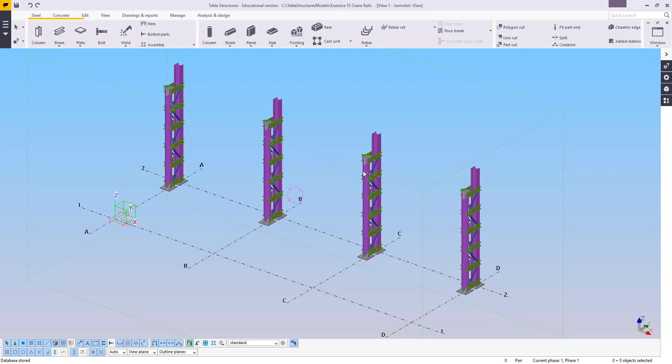If you have a look at the drawing provided, you'll see we've got this plate girder up here with a bunch of stiffeners inside, and it goes through the entire building. It does need to split because it can't be the length of the entire building, and you'll find it's got these stiffener plates inside but it's still continuous. What's going to happen is they're going to split it right here on the centers, but they are going to weld it up on site.

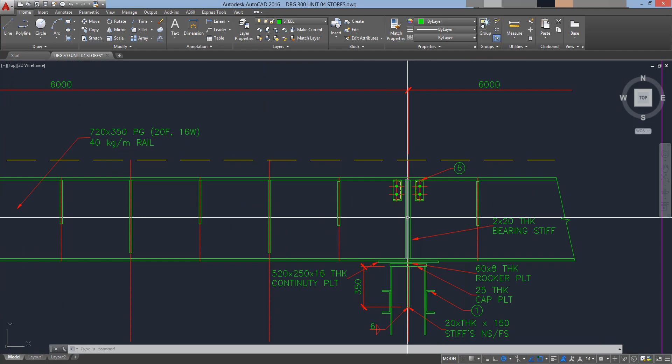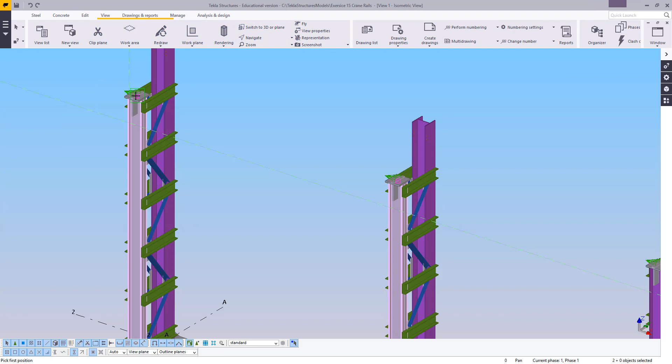So let's start off by first putting in our plate girder. In order to do that, we're going to need a nice side view. I'm going to untick the geometry lines, which means I can only select reference lines or main points, so when we do it now we don't have to struggle to find the right spot - it'll more easily snap to the main point on either side.

Now let's head on over to our steel, open that up. It'll be an M, or CB, crane beam. We need to close up beams because we're looking for a 720 by 350, and we do not have something that's that big. What I'm going to do is go to my drop down menu, go to catalogs, and add it as a profile.

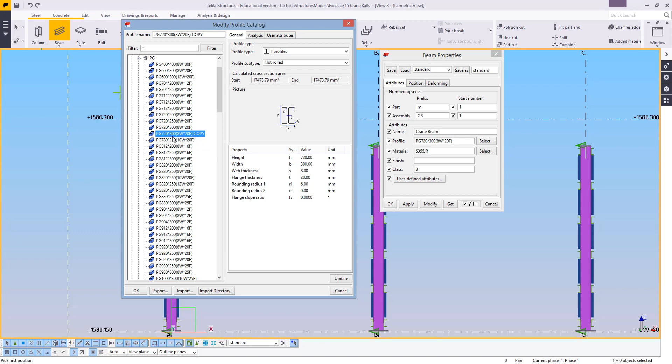So let's see, we're looking for an I, we're looking for a plate girder. This is the closest one we have to the actual size, so we're going to use that as our base and make a copy of it. Once you've made a copy, head on over to the top name and just remove 'copy'.

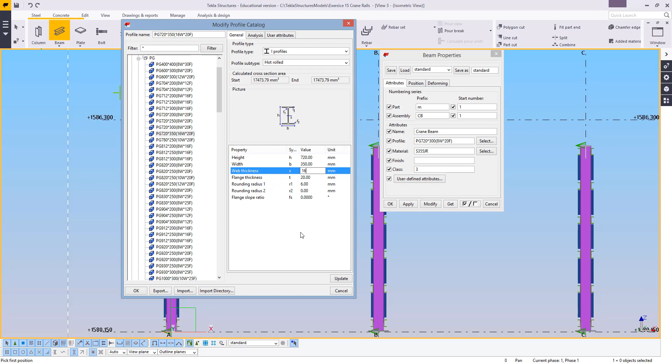Change the flange, we're looking for a 20 thick, that is correct. We're looking for a 16 web, so change that to 16W, and that'll be that one over there. Press enter just to confirm, but that was only the name - now we need to do the same thing with the actual dimensions. 350, and the web is 16.

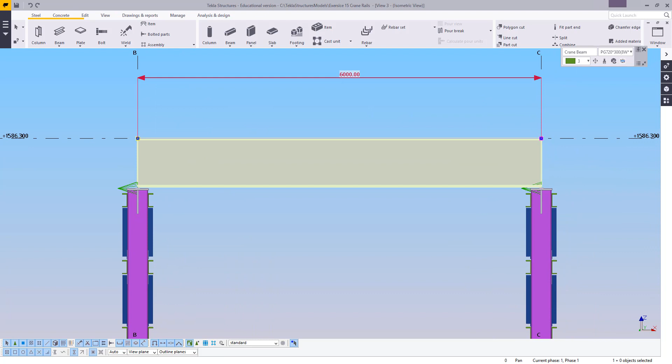And this is going to be in these three spots. For now, I'm going to delete those two - that's probably the best way to start off with, as they'll all basically look the same in the middle.

Now the first thing we need to do is to take these ends, and we're going to put in a 20mm bearing stiffener. We're going to look for stiffeners, and we're going to look for our normal 1003. This is going to go right at the end - actually not right on the end, about 10 back, as this is 20 thick. And we're going to go over there, just make these 20.

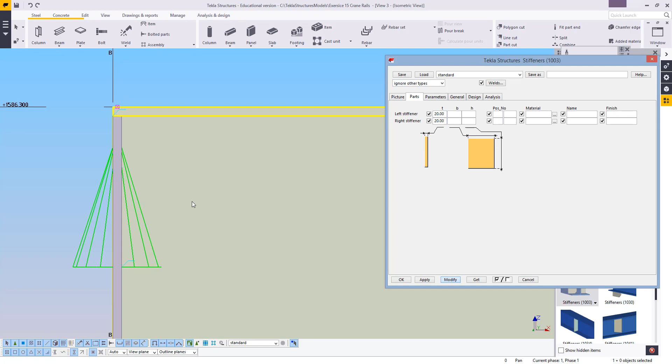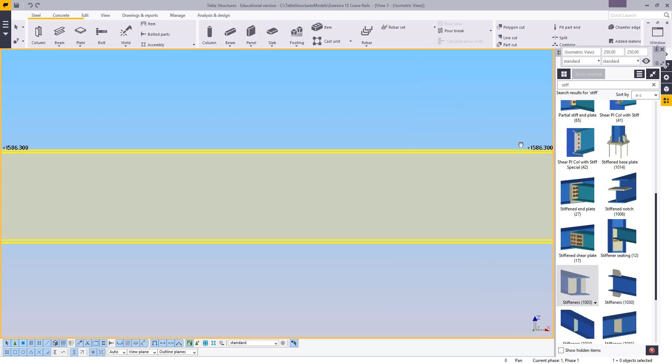Also, I'm going to take both of these and then just shorten them by 2mm, and do the same for this side.

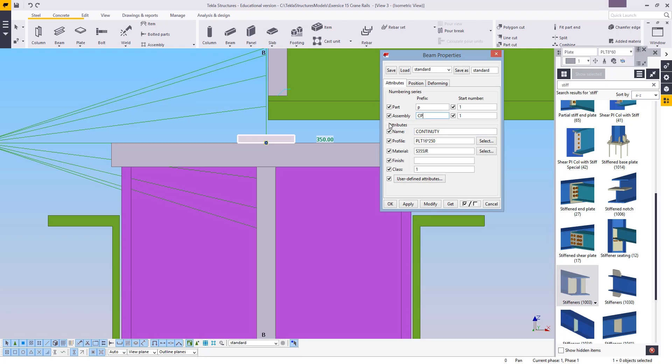Now, like we did the plate here at the bottom, this rocker plate, right under that or above that, we've got the continuity plate. So that's going to be 16 thick by 250 long. This is going to be a continuity plate, CP. Excellent - grab over there and just say it has to be 520.

Now this will most likely help if I just change it to behind, as I'm using the top. I'm also going to move it back by 2 millimeters, get that point right on the middle, then I'm going to grab it in the middle and move it back again.

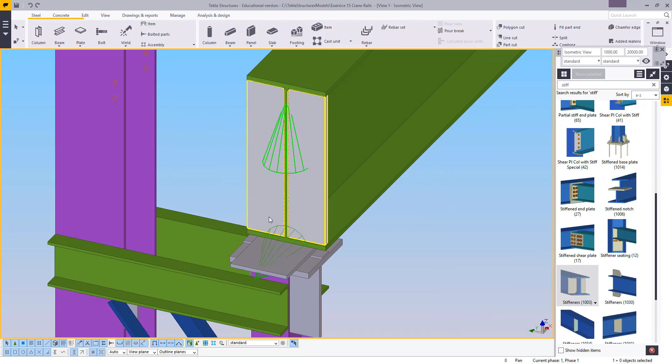Good. Now, I'm not going to weld any of this stuff to the frame. I'm just going to put a note in that requests that it is welded on site.

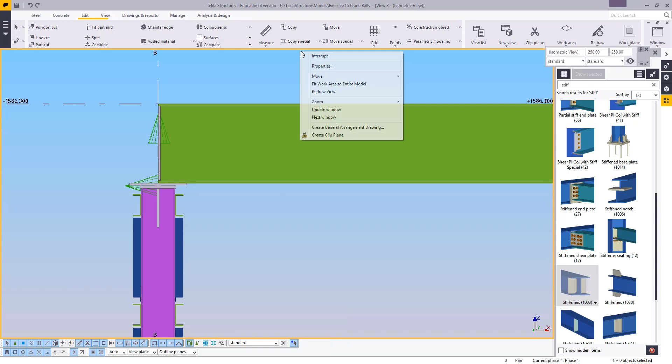Next thing we're going to do are these shaped stiffeners that come into the plate girder. So let's head one down to 1041. Now it doesn't show that well in the picture, but this is a shaped stiffener, and you can make it however long you want. Now we're going to need points for this, as we'll be putting it in intermediate positions.

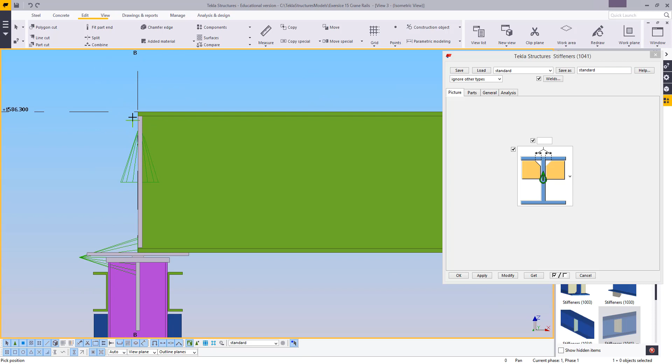So I'm going to put a point down at the start and then create a copy. This is going to be 600 for the axis, and I'm going to say 10 as that. Now for our stiffener itself, this inside corner is going to be 68.

Part wise, it's going to be 16 thick and 150 long. So 380 applied, and we can put it in the first and every second thereafter, every two thereafter, and that'll be done with that.

These longer ones are 50 less than the bottom flange, should give us about 620. So we can put this in here, 620 applied, and put that in there.

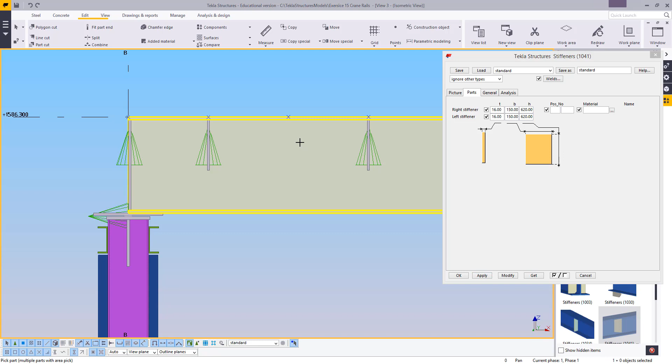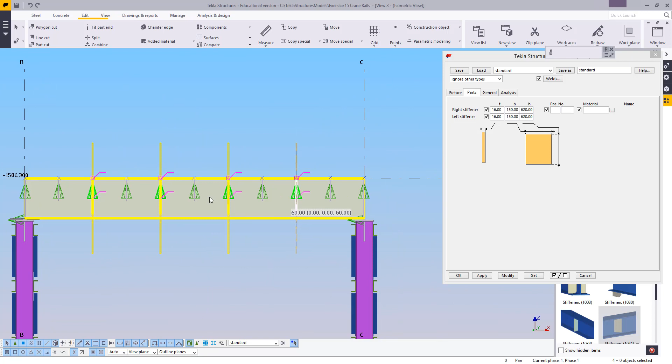Now, never trust your own math, at least I never trust mine, so I'm just going to take a measurement from the bottom to there and make sure that it is in fact what I wanted it to be. So in this case it's not, that should be a 30 instead. Let's try this again. 50, excellent, now it works.

Okay, so the next item we want to put in is our rail. So let's head over to steel, open up the beams. I'm going to call this crane rail, so CR. As for the profile, it'll be right here at the bottom under user defined fixed.

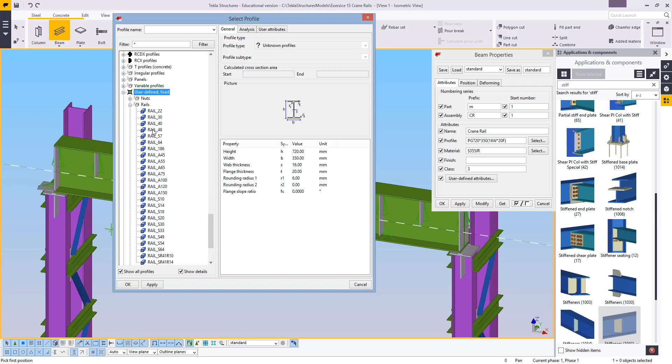If we open up rail, we'll find that rail 40. Now the name of the rails is obviously based on their weight. This goes front because I'm on top, and let's make this something like a yellow, so it's nice and visible.

Now this is not going to be the final position or size of the rail. I'm going to split it, but I would like to split it in the middle of a section, since I'd like these to be continuous. So what I'm going to do is go over to edit and just split it with a split command. Right in the center will do.

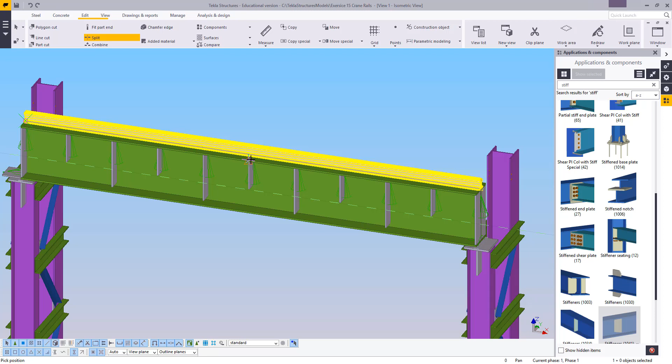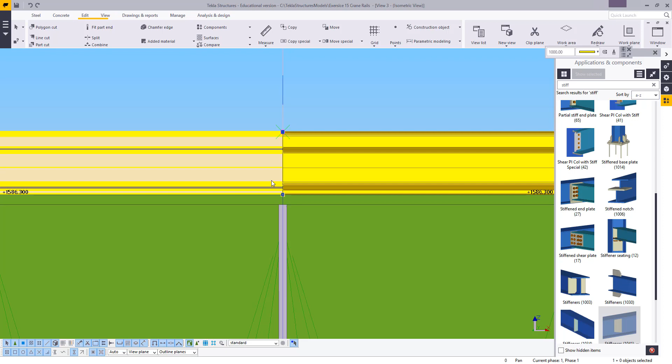Next, we don't want a straight off cut. We want this to be at an angle, just to prevent it from forming a sharp edge. So if it does press down a little bit for some reason, it does that at an angle, so the two sides line each other.

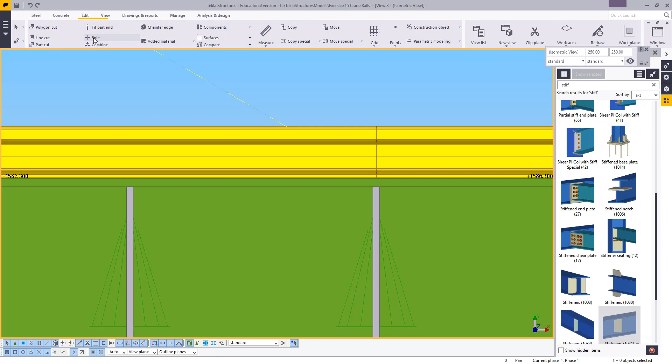Now let's take this to a parallel plane, and then we're going to take these and say move, rotate, grab that, and we want to move it by 60 degrees. Next thing I want to do when doing the cut itself, fit part end, let's make this a little bit see-through.

Next thing is, of course, the mounting points. Now, to mount this rail, they are going to be using a clip. They're going to use a Gantrail clip of this number at 640 millimeters in 12s. We're at 8.8 bolts over here, and they are going to be torqued down to 390.

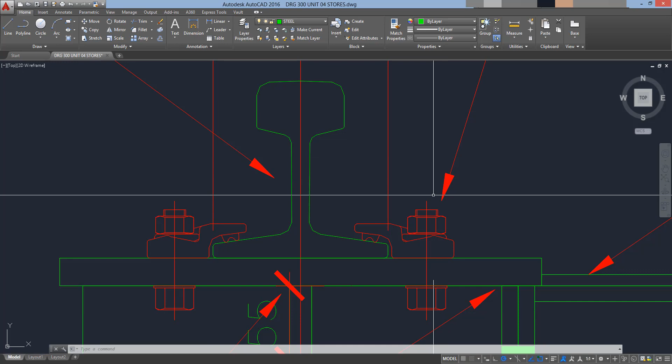Now, we do not have these rail clips in our catalog, at least as far as I know, and I don't think we've got a component for them as far as I know. So what we are going to do is create our own little custom clip. I'm going to start off by getting a front view.

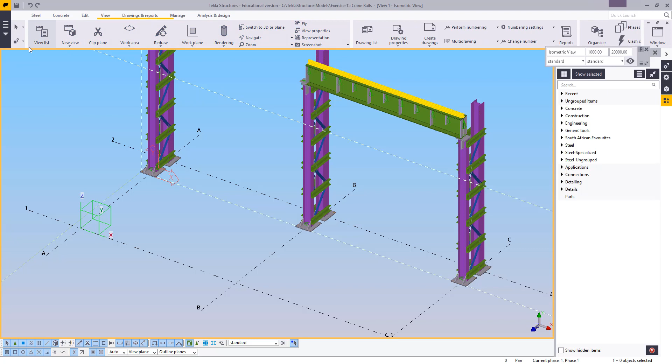So let's start off with views, new view, 2 points, use gridline B, that's going to be fine. And we are going to basically just draw it out of a contour plate.

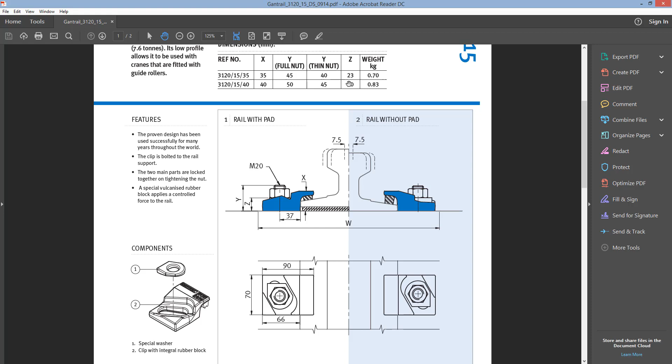I would suggest looking up and getting a catalog for the specific rail clip you're going to be using. In this case, 15 by 35. This is the rail clip from Gantrail. So from the rail edge, we've got 37 right from the edge to the bolt center, and the width extra that our bolts need to be is Z, which is 23.

Now, this looks fairly haphazard, and to be honest, it is fairly haphazard. What I'm going to do is I'm going to put in a contour plate. And as you can see, this is just a random little piece of metal.

Next, we're going to say between these two, just get our lines back, between these two, there's a bolt roughly this position over here, and we're going to face it inwards.

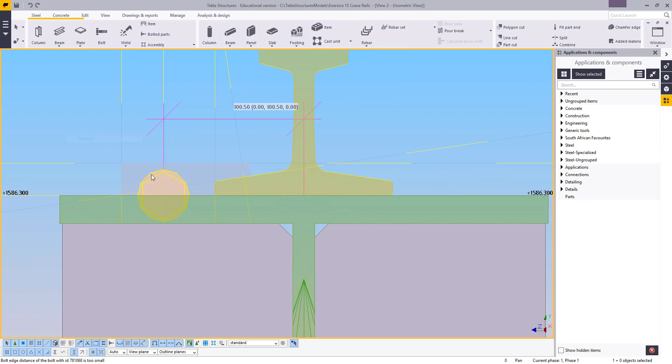Let's turn this to top or bottom, below. Okay, and we've got our rough estimate right over there.

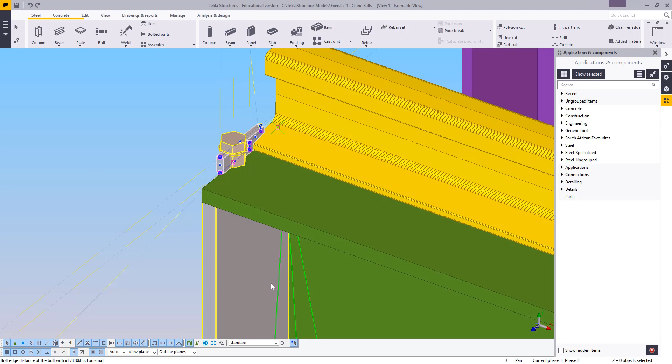Now, this is still on the center line, and according to our draw, it needs to be 640 every. So we are going to move it by, well, half of it. So that's going to be 320.

And let's make this wide. Since this is an M20, we're going to be using 70.

So the reason why we are doing this so haphazardly, change this to M, is because this is a bought out part. In other words, the material is going to be component. There's going to be no drawing of this. Basically, the only reason we want this is so that we can give an amount.

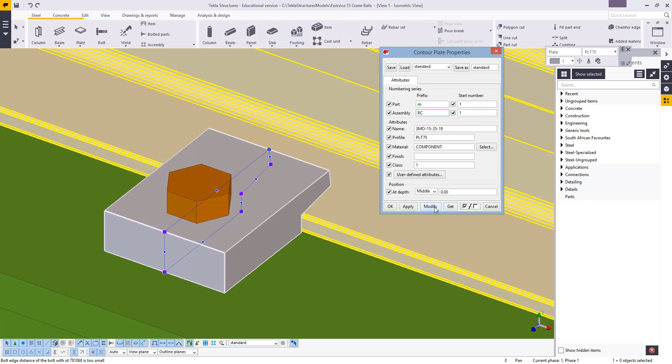So this is going to be 3 M 0 or O, not sure. 15, 35, 19. RC for a rail clip, and that is going to be exactly what we want.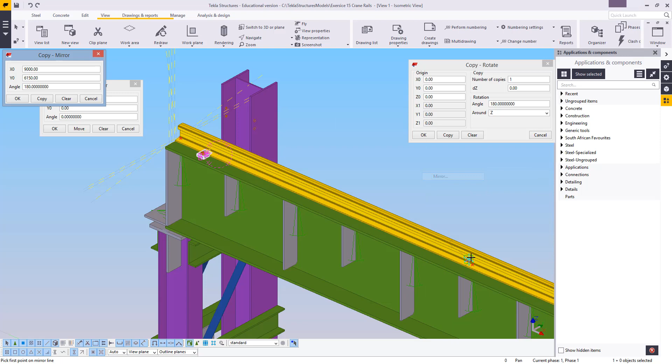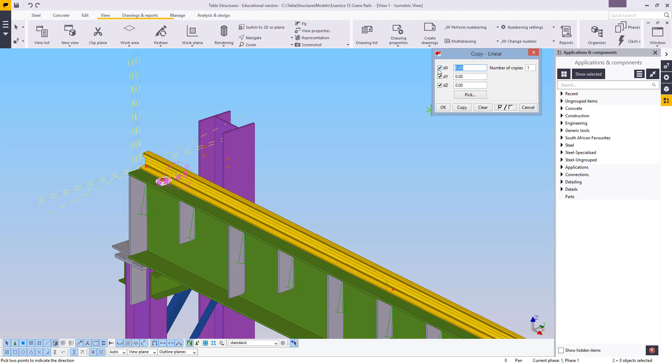Next, grab these 2 clips, go to special, linear, clear all that, and we're going to have 640.

These aren't the final positions of the clips, as you'll see in a moment. They don't 100% line up with the actual size of the beam, but what we are going to be doing is taking these and moving it back by 20.

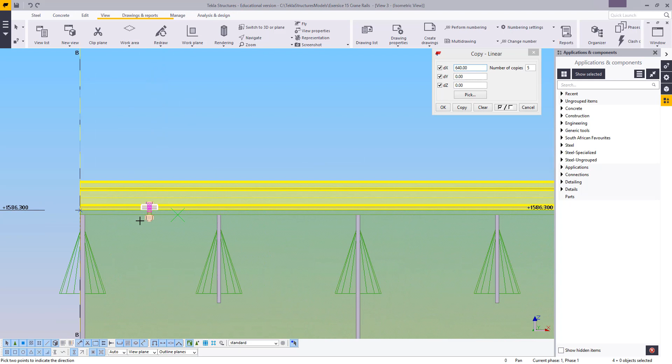Right over there, set 20, so that it's flowing from the side. Now what this will do is put it right in the middle of these stiffeners, which is also a very nice position for them to be. Let's make that 0, let's make that 10, and copy the last one is not necessary.

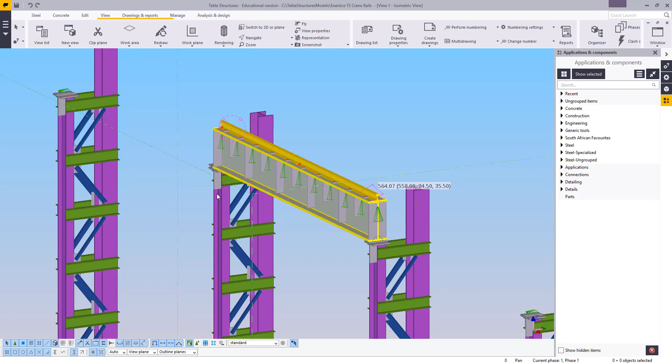That should be it for the standard rail. In other words, one over here. So now we're going to say, right, we want...

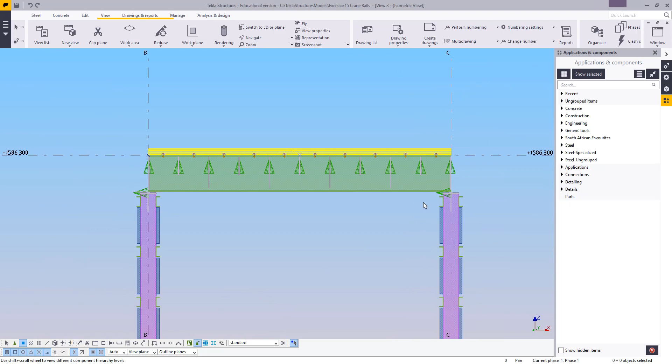Well, just about everything. Let's head on back to the side view, change our selection to just be steel, and grab all of the stuff, components, and we can just take copy right over to that side, and we've got a perfect copy of it on this side. Now what I am going to be doing is combining these two and getting rid of these cuts, as they are wholly unnecessary.

So let's look here, these are the cuts, those lines over there. If we select them, we are going to combine them, as we'll only be having a couple of longer rails instead of short rails.

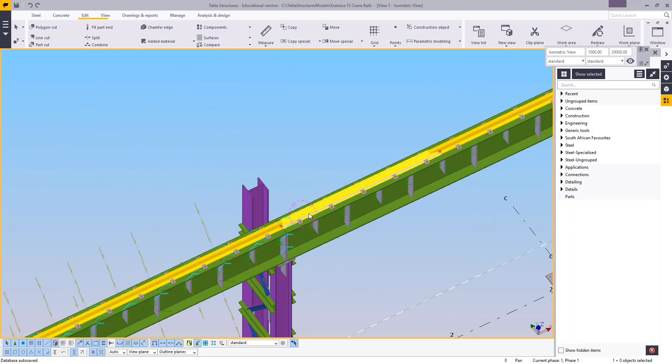Now I'm not going to do the combination over here right at this moment, but first I would like to change the end to be, well, the end, as this is the final point of our rail.

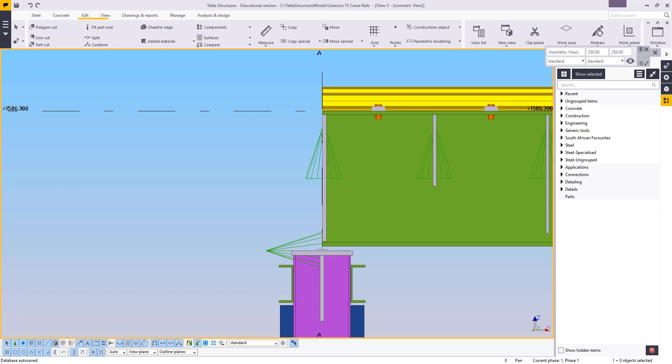We are going to change this into, let's see, the rail stop right over here. Now the rail stop is basically going to hang over the entire thing ever so slightly by, well, not 1500. Let's just match this over here, 150.

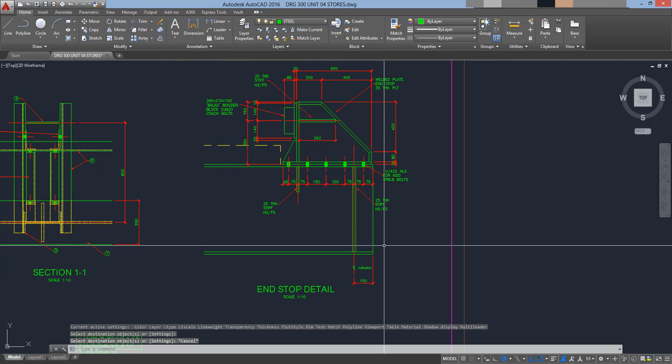So this here is going to change. Firstly, it's going to move right up to the center. Secondly, it's going to move 150 extra.

Now the stiffener on the end is going to be a little bit different from the others, as it's going to be 25 thick instead of just 20, and we're going to have this nice little plate bracket over here.

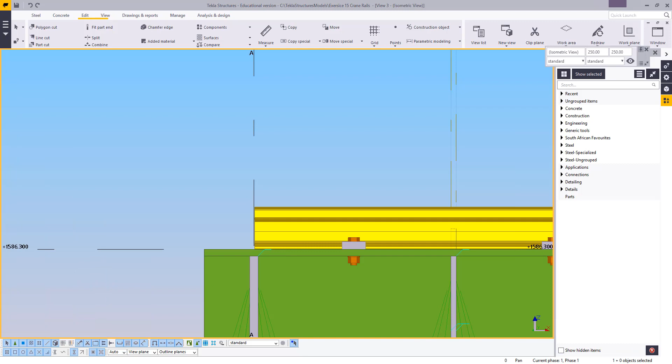So for this one over here, we are going to be laying it out with lines, but first let's get rid of that rail clip.

Okay, let's see, edit, construction line, start up here somewhere, and finish under there. Take this line, copy special linear. I'm going to say x is minus 75. Would like 2 of those.

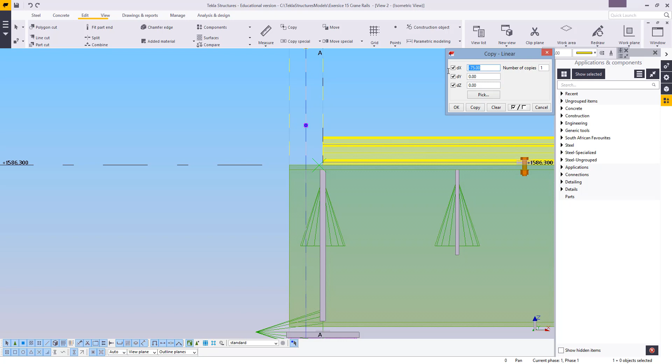Next we're going to do it positive 75 this way. Then we're going to do 150. Want 2 of them. So 2, copy, another 2 at 75, and then 1 at 45.

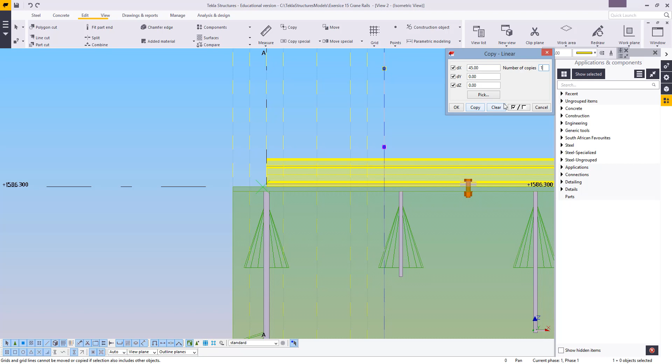Go. And that should be roughly it. I'm going to take this stiffener over here, apply that, take it and put it right over there, and change it to our 25 thick stiffener.

Now, although it does appear shorter in the CAD drawing, I'm not going to bother making it shorter, as they don't really give us an actual size there. So I'm just going to leave it the same size, much easier.

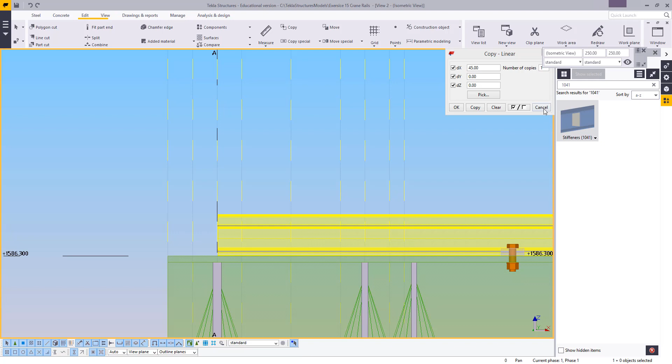Let's close this. Next, we're going to head over to steel, open up our beam, and load up a standard plate. This will be just a lowercase p, and this is going to be a stopper bracket.

Stopper bracket. Now obviously you can name that bracket stopper, rail stopper, anything that's fairly descriptive of what it does, and that'll be fine. They don't give us a width, so we're going to say about 300 should be fine.

It can't be more than 350, which is the width of the plate girder. It's basically just to keep the crane from going off the rails. And the wooden block that comes on there is only about 260 by 210, so 300 is a good size.

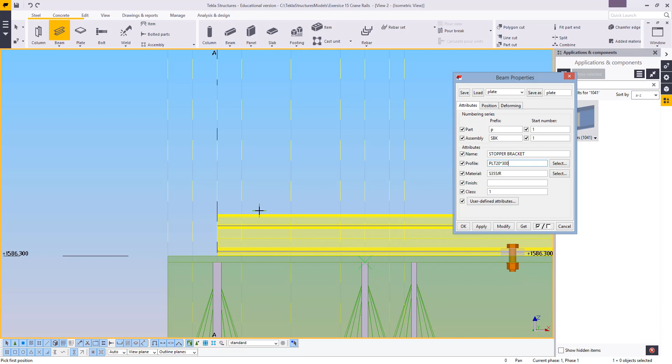Let's apply this, and we're going to start off anywhere over here, and we would like it to be all the way right up to the end over there.

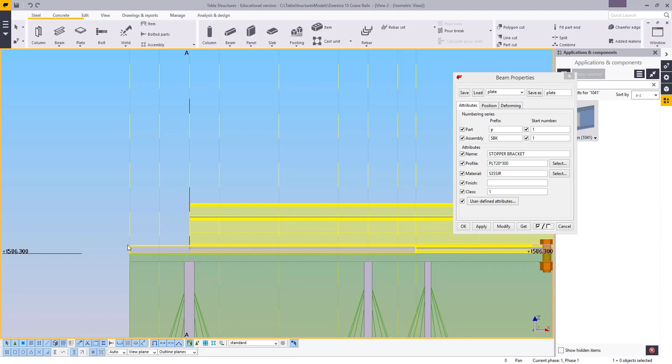Now obviously it's not going to be right up to the end, it's a little bit shorter, but they don't really give us a position, so we're going to have to work that one out.

Next, let's get this rail out of the way. Let's take it and move it from where it's currently at, wherever that is, plus a little bit extra just to give it clearance.

Next thing is going to be right here in the middle of this piece, in the middle of this 20. We're going to have the one that goes right up the top, and that's going to be 480. So grab it right there, say 480 upwards, and from here we can take it and move it right to the center.

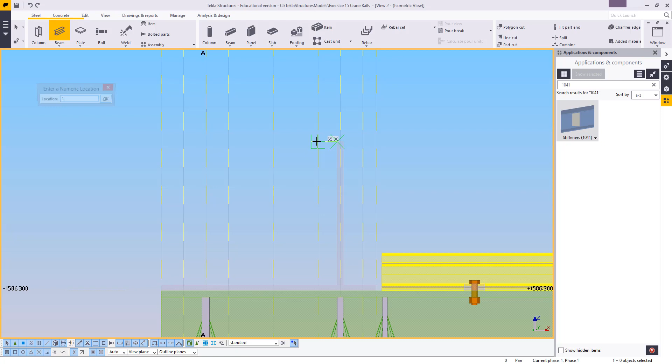Now from here it's going to go to the back by 200 less than 20, so 180. This way, let's just drop it down, front to behind. There we go.

Next, from this point over here, we would like it to go back 400, down by 400. So we're going to press R. Here we're going to say the X, in other words, the first one over here is going to be minus 400. The Y, which is looking away from us, we don't really want anything to do with the Y, so we're going to say comma 0, and the Z we would like it to go down, so again comma minus 400 this time, and that should put us in the right position.

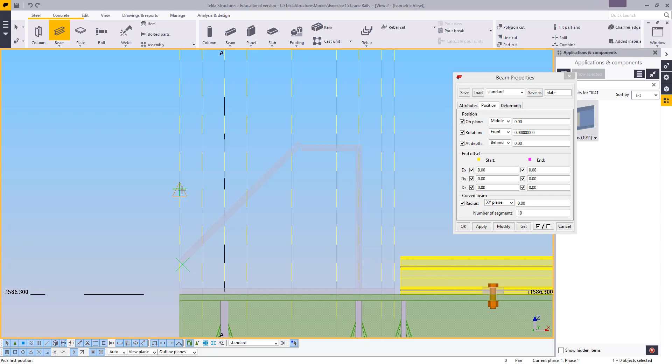Alright, now from here we'll take the last one and just finish it off. And there we go. Now we can take the end and shorten it by 10.

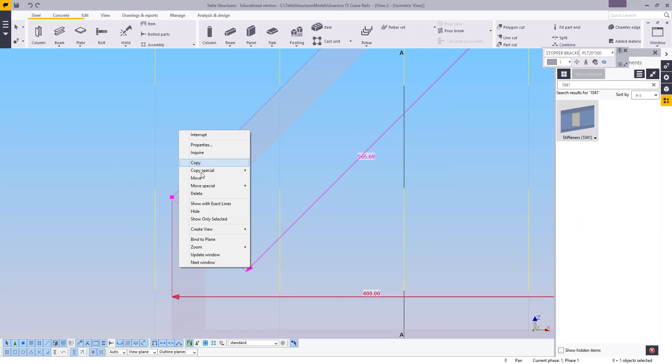Good. Once that's done, what we want to do next is take these and then shorten them a little bit. So take that one over there, shorten it a little bit down.

Instead of moving the node like I just did, you can always go to edit and use a fit part end to just shorten it to where it actually touches.

Now you've got the basic frame. From here, you can go back to steel and open up the contour plate. Change this to lowercase as well and make this 20, since everything here is going to be roughly the same 20 thick plate. And of course the note says welded plate end stop, 20 thick.

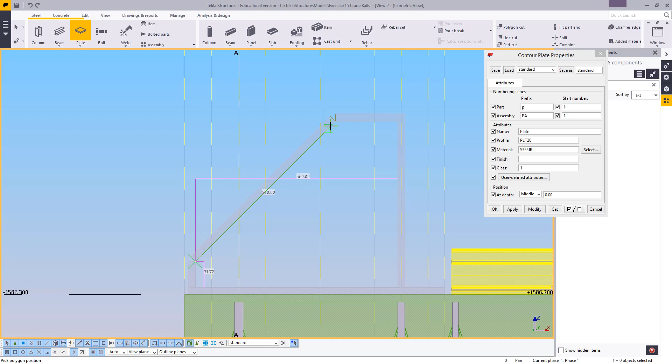And we're going to make this entire inside a nice 20 thick plate. Once that's done, we are going to say weld up everything for now before we add any of the other stuff.

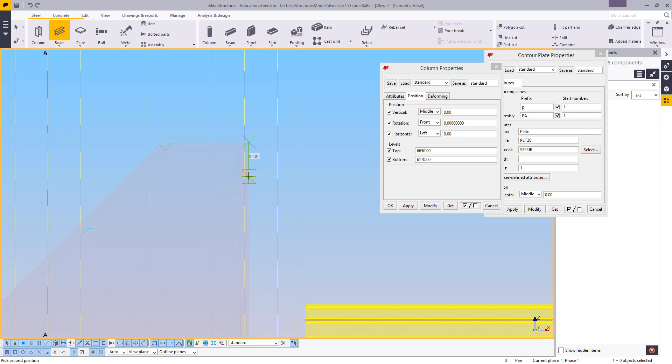What we want is a plate that is 280 long. So from here downwards, 280, and then from there it has to move down by 10. A little bit, 10, good.

Next, let's close that, this as well. Open up the beam. We are going to change material to wood, timber undefined.

And we're going to change the name to Balau, we're going to make the thickness 80, and we're going to make it 260 wide. There we go.

Then from here we're going to take it and we're going to make it 210 long. Let's just change our class to say 8. It's a nice difference between them.

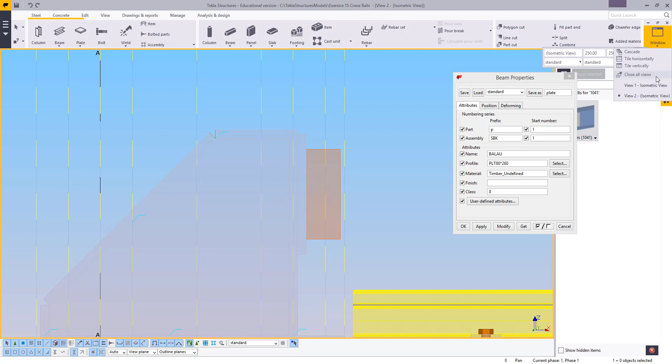We're going to grab them somewhere in the middle, move it down by 35 so that it's center on center. Let's have a look at the 3D. That looks about right.

Now, this wooden block is going to be affixed to this entire thing with a couple of coach screws, but unfortunately we do not have coach screws inside our Tekla bolt catalog.

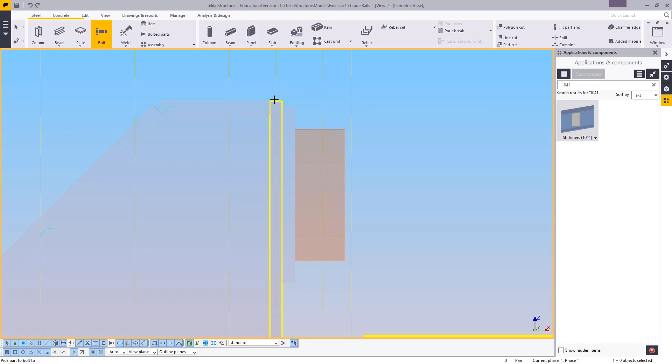I'm going to say just put a bolted group on those two plates. Grab the center over there and put it down.

Next, I'm going to say right here at the center, put a construction line in for my stiffeners that are going to come in here.

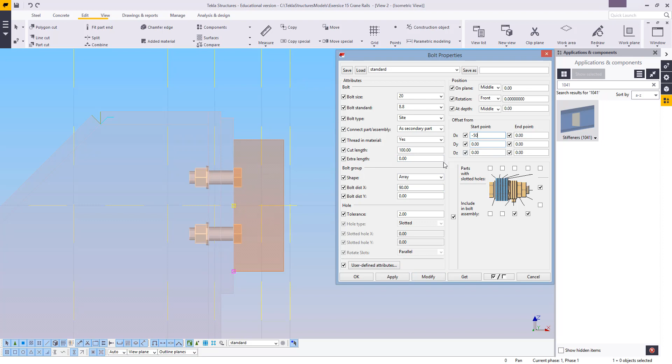And then I'm going to say, right, let's say minus 45 at 90. Have a look at that. I might be able to go a little bit more. So how about minus 50 at 100?

That looks good. And here I'm going to say 140 across. And I'm going to change this to just be holes, M20 holes.

Now, as you can see, there's no holes in the wood, but there is holes in the steel. So they're going to pick two of these holes, most likely cross or across, and they're just going to put a coach screw in from the back, and it's going to bite into the wood, and that'll be done when they assemble this stopper.

Next thing, take this over here and copy it from center down to over there. Remove that cut, and I'm going to just lengthen it by an indeterminate amount. I just want it longer, so that when I shorten it, I can get right up to the tip.

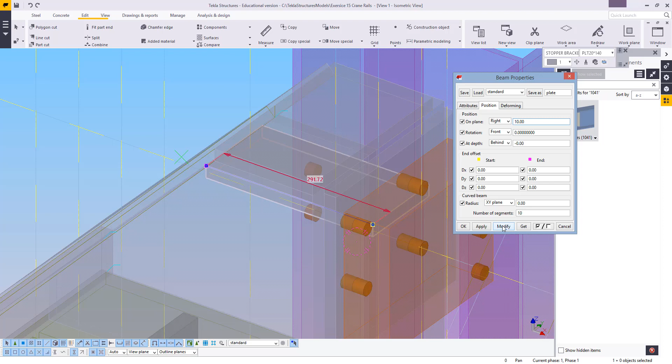Next, this thing is not straight through, it's only on one side. So we're going to say half of 300 is 150, minus half the thickness here, so that's another 10, giving us 140. We're going to change our middle to left or right, doesn't really matter, and we're going to add 10. Grab that, a piece of stiffener on the one side.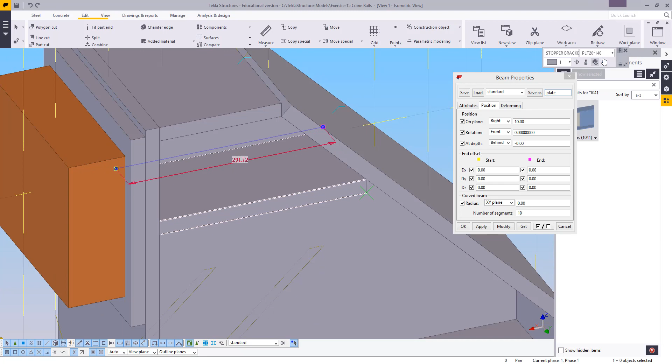That's good enough. Next, we're going to take this and just copy it and put it down exactly on the same spot. Now, Tekla is going to warn us that we are making duplicates, and that is the idea, so just accept that. Select one of the two duplicates and go and swap handles. Swap handles, great. Once you've swapped handles, you'll have one on either side.

Next, I'm going to grab the welding again and just weld everything to it. That includes the wooden block. Now, let's head back to the side and go fix up our bolts with that.

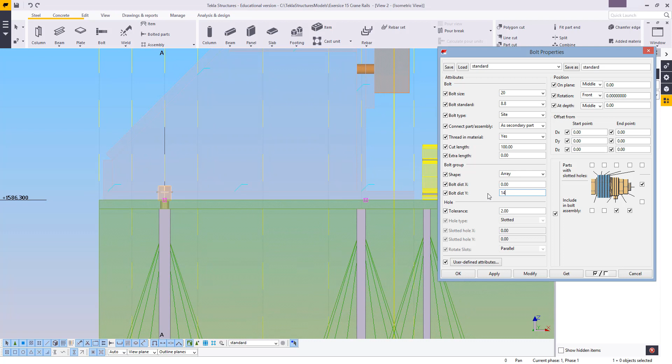So I'm going to load up my command, and I'm just going to reset this to my standard. Alright, so that's going to give me a bolt over there. Now, cross centers wise, as we've got a 300 wide, 140, 180 thereabouts should do.

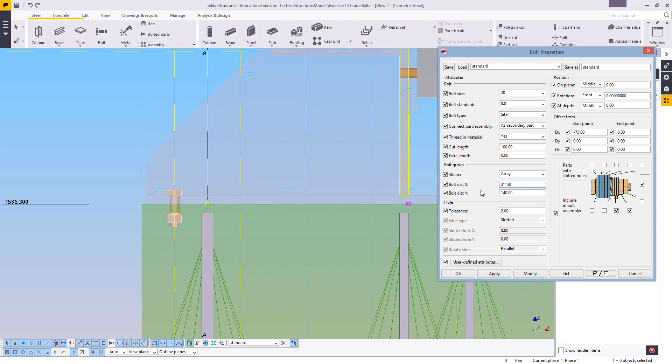Next, I'm going to say minus 75 over here to get it to the accurate starting position. And then I'm going to say I would like it at 150, and let's say, well, not 13. Get rid of that, say about 4 of those. So 4 times 150, and that gives me all the bolts that I currently need.

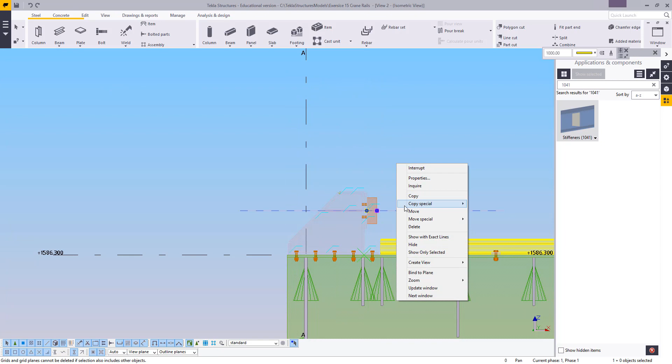Next, we do need a small little stiffener over here. So I'm going to say, just get rid of all those lines. I'm going to move this one down to right over here, and then move it down again by 20.

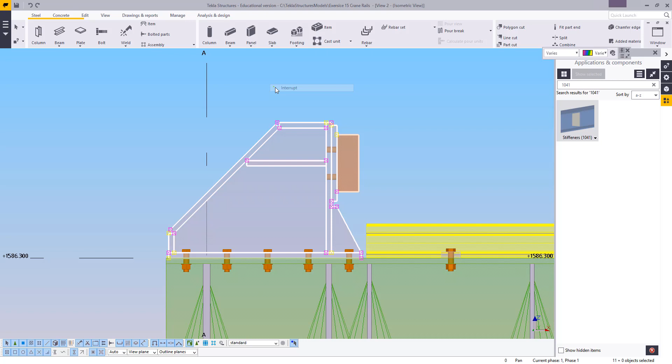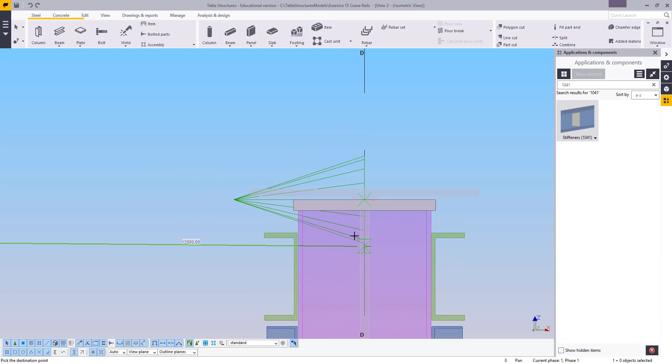Now we'll press Alt, just click on it somewhere, just to make sure that the entire thing is an assembly, and it is. Now, as you've noticed, we've got nothing here underneath, so we're going to take our continuation plate and just copy it over to this one here, that one over there, and that one over there, so that we've got it underneath all of them.

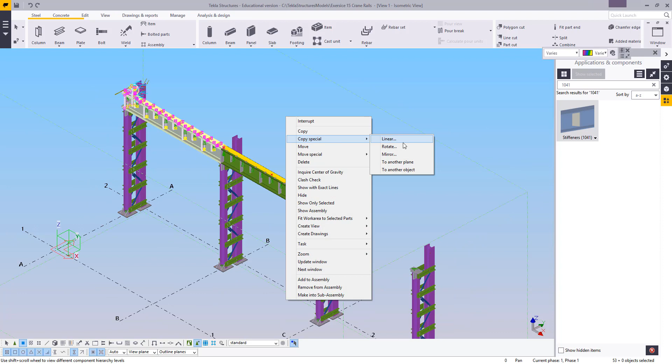Next, I'm going to change my selection to just feature parts, select objects, select here, the beam, and here we're going to say copy special, rotate, grab the point right there in the middle, and copy it 180 degrees. This should give us our beam exactly the same on the other side.

Once that's done and you've checked that everything actually came out the way it should, go to Edit, use Combine to combine these two rails, as well as these two as well. Let's just change our selection back to what it was, redraw. That should be roughly about everything there.

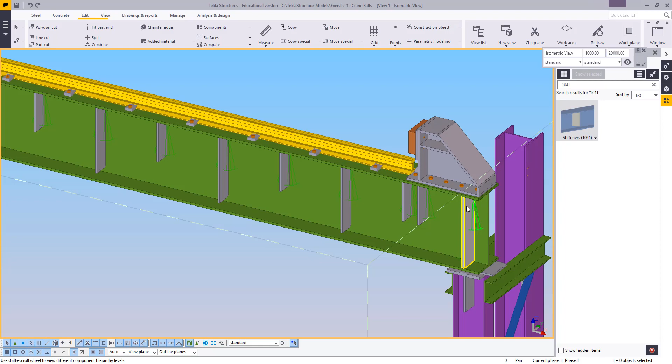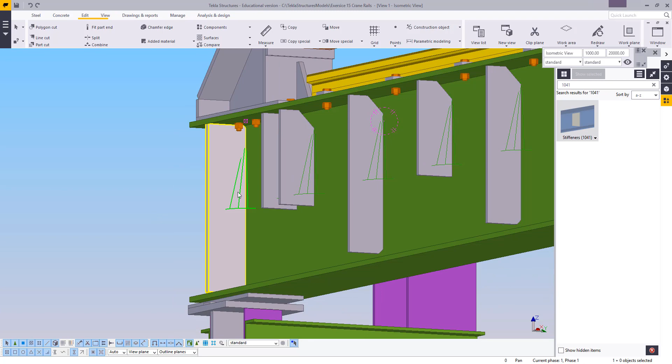Got now our stiffeners on both sides, our stoppers. Now, if you notice on the stiffeners, most of them have these massive gaps over here. That 80, let's just check that, yeah, that's 68. But we do not have that for our ends. And unfortunately, we do need them for the ends, since these are mostly there for the drip dry part of our galvanizing.

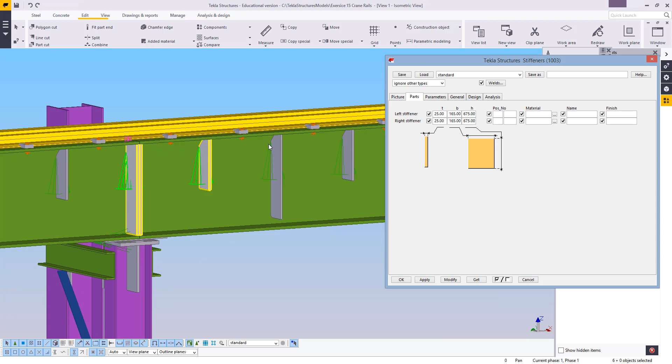We will need to add them to the rest of our stiffeners as well. So we're going to select all of those, head on over here, and just add 68 to these two as well. This way, once I've dipped it, they can just leave it out and it'll run out everywhere instead of pooling.

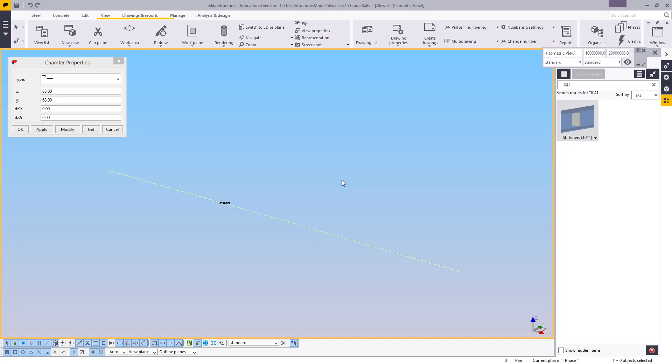Now, as for the bottom side, there's nothing there that allows you to do that. Change selection to items in components. I'm going to double click the one right up there, create a direct view. Let's just get those 2 points. Change this to, well, add a couple of zeros on each side. Get a nice front view.

And as you can see now, we can select all of them, highlight the little tab, select all of them, use an Alt area select to grab all of those, close that, and that should be it for the rails.